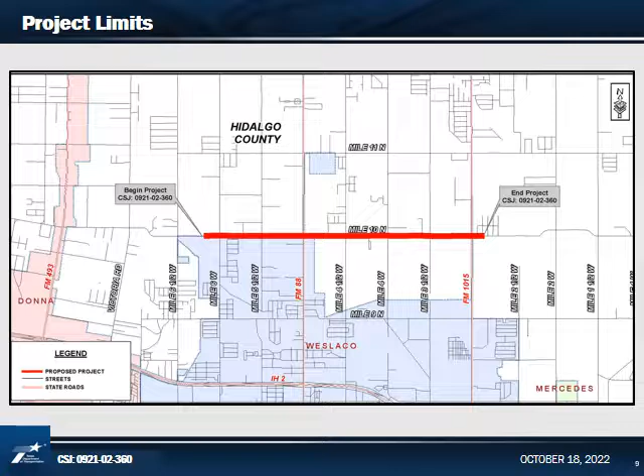The scope of the proposed project includes widening the existing roadway to provide 4 travel lanes, a 2-way center left turn lane, pedestrian and bicycle accommodations in the form of sidewalks and a shared use path, and right turn lanes at major intersections, and a dedicated auxiliary lane at the schools would also be provided. Flashing beacons or traffic signals would be installed at all intersections as identified by a traffic analysis study, and drainage would be provided by roadside ditches and an underground storm drain system. Outfall improvements would also be made.

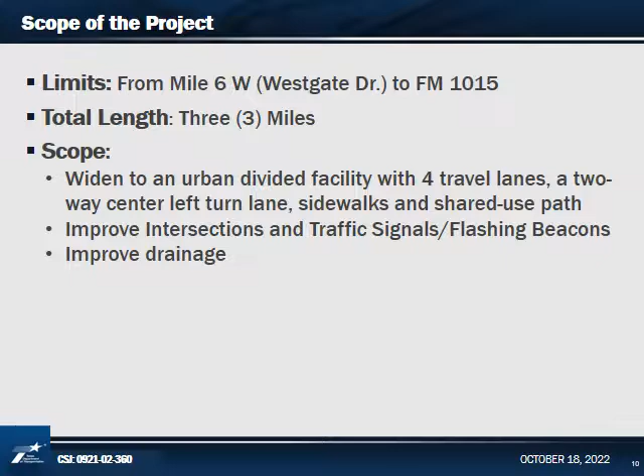The proposed project is needed because increased traffic is leading to higher levels of congestion and decreased mobility and efficiency on this stretch of Mile 10 North Road. A section of Mile 10 North falls within the 100-year floodplain, so there is a need to improve drainage to allow for the safe movement of vehicles during storm events.

The purpose of the proposed Mile 10 North project is to improve mobility and alleviate congestion by increasing the number of lanes, enhance safety by providing turning movements at intersections and at schools, and by providing accommodations for bicyclists and pedestrians with the addition of sidewalks and shared use side paths.

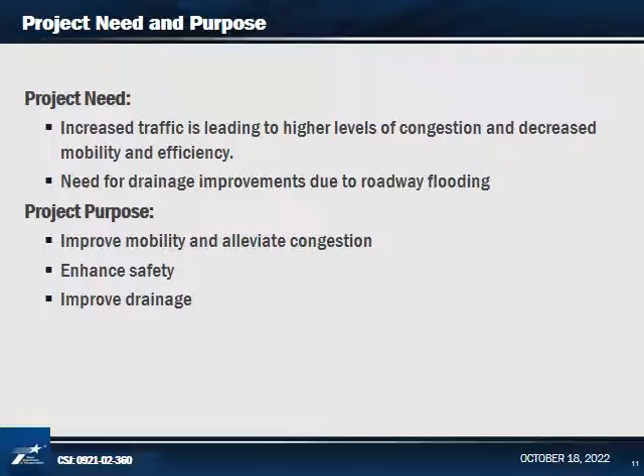Drainage improvements would be made by adding a storm drain system, increasing the elevation of the roadway in the areas of the 100-year floodplain, and by cleaning and widening the existing drainage ditches to drain storm water runoff from the roadway.

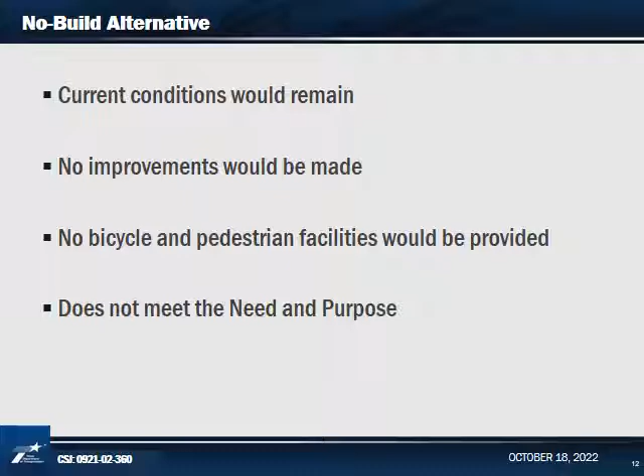Two alternatives were studied and considered for this project: the no-build and the build alternatives. Under the no-build alternative, the existing conditions of the roadway would remain and the existing roadway would not be widened or reconstructed. No improvements would be made to intersections or drainage, and no alternative modes of transportation, such as bicycle and pedestrian accommodations, would be provided. The no-build alternative is not recommended because it would not meet the need and purpose of the project.

Under the build alternative, the existing roadway would be widened to a divided urban facility consisting of 4 travel lanes, a continuous 2-way left turn lane with sidewalks, and a shared use path for bicyclists and/or pedestrians to use.

The project would require approximately 32.18 acres of new right-of-way, of which 14.43 acres is for the roadway and 17.75 acres is new right-of-way for the outfalls.

The intersecting roadways of Mile 3.5 West, Mile 4 West, Mile 4.5 West, and Mile 5.5 West would be improved to provide left turn lanes, in which right-of-way would be required on the north side of Mile 5.5 West and on the south side of Mile 3.5 West.

A storm drain system would drain stormwater runoff utilizing 4 existing outfalls. Two would be improved in partnership with Hidalgo County Drainage District Number 1, and 2 would be widened and cleaned as part of the proposed project. In addition, improvements would be made to the existing drainage structures crossing Mile 10 North.

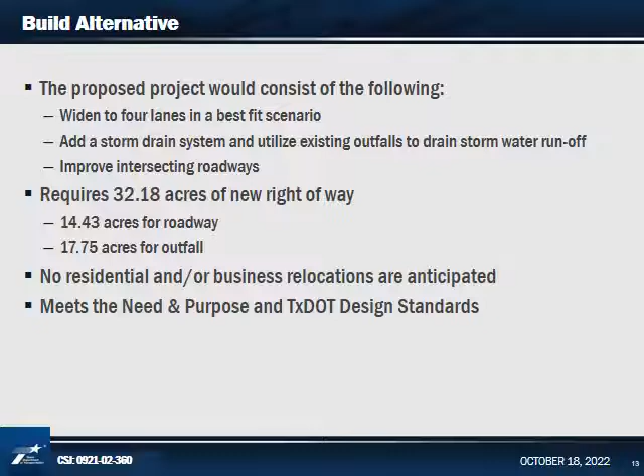No residential and/or business relocations are anticipated. This alternative would meet the need and purpose of the proposed project and would meet or exceed TxDOT design standards.

Mile 10 North from Mile 6 West to Mile 4 West would be widened to a 4-lane urban facility within a proposed usual 90-foot wide right-of-way. This 2-mile section of Mile 10 North would be improved to consist of 4 12-foot wide travel lanes, a 12-foot wide continuous 2-way left turn lane with sidewalks, and a 12-foot wide shared use path for bicyclists and pedestrians. The placement of the proposed sidewalks and the shared use path would vary from the north and south sides of the roadway.

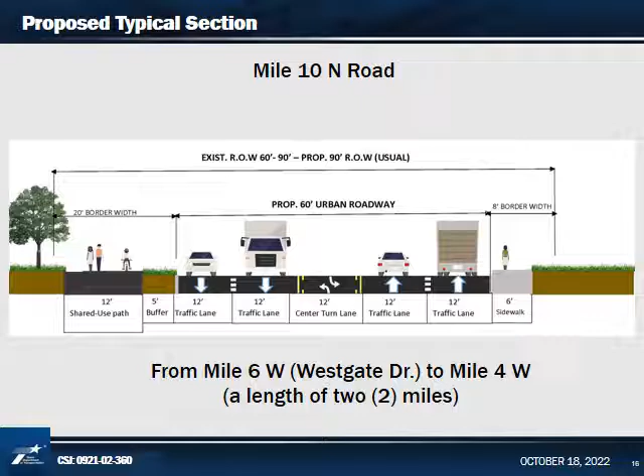Mile 10 North between Mile 4 West and FM 1015, a length of 1 mile, is within the 100-year floodplain as identified by the Federal Emergency Management Agency, or FEMA. Therefore, the roadway would be elevated to allow for 1 travel lane in each direction to remain open during a 100-year storm event. For these limits, Mile 10 North would have roadside ditches in addition to the storm drain system.

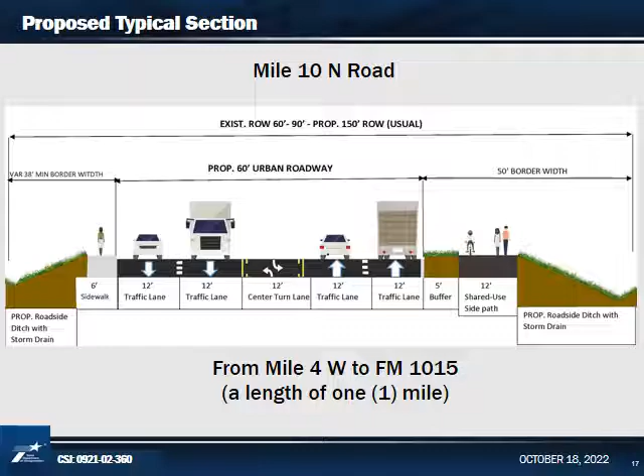This section of Mile 10 would consist of the same typical section as the previous section, except this section has a variable proposed 120-foot to a usual 150-foot wide right-of-way. Detailed typical sections are available for viewing online.

There are 4 outfalls that would be utilized to drain the storm water runoff for the project. 2 would be improved as part of this project, and 2 would be improved in partnership with Hidalgo County Drainage District Number 1. Outfall Number 1 is an existing drain ditch owned by Hidalgo Cameron County's Irrigation District Number 9, located approximately 1/4 mile west of FM 88.

Proposed ditch improvements would begin at Mile 5.5 West, cross Mile 10 North and FM 88, and end near Sugarcane Drive. This ditch is a usual 20 to 30 feet wide within variable 65 to 188 foot existing right-of-way width. The proposed improvements would be to widen and clean the existing ditch and improve drainage structures at the Mile 10 North and FM 88 crossings.

The outfall would be 106 feet wide within a proposed usual right-of-way of 150 feet, a length of approximately 2 miles. Approximately 13.23 acres of additional right-of-way would be required to improve this outfall.

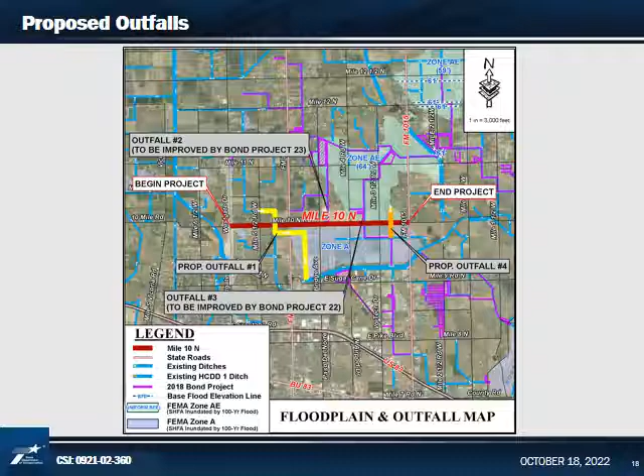There is an existing main irrigation line located between mile 6 west and FM 88 that runs parallel to mile 10 north, owned by Hidalgo County's Irrigation District number 9. Extensive coordination efforts have taken place between Hidalgo County Precinct number 1 and the Irrigation District in an effort to minimize the impacts on existing homes. A 30-foot easement owned by the Irrigation District would be purchased as part of this project.

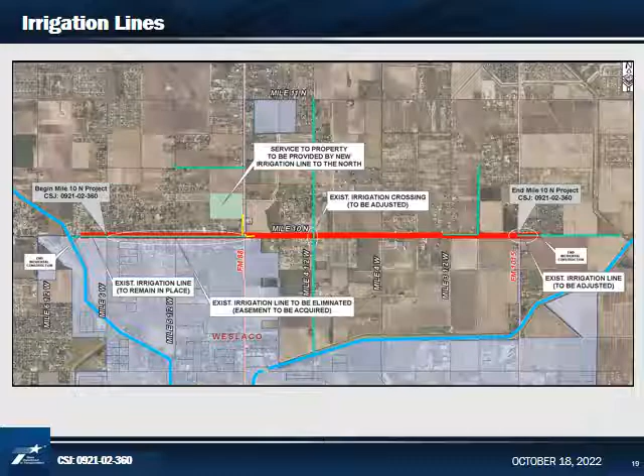The right-of-way acquisition process will follow federal and state laws and policies. The Uniform Relocation Assistance and Real Property Acquisition Policies Act of 1970, known as the Uniform Act, is a federal law that is followed for appraisals, negotiations, and relocation of families and/or businesses.

Hard copies of the right-of-way brochures and property owner's Bill of Rights will be available at the right-of-way table at the in-person public meeting and are also available at Hidalgo County or TxDOT websites. Hidalgo County is the agency responsible for acquiring the additional right-of-way from the individual property owners for the project.

TxDOT will ensure that the local public agency acquires all real property in accordance with the provisions of Title III of the Uniform Act and its associated federal regulations, 49 CFR Part 24. All negotiations for right-of-way conducted are subject to this law and these regulations.